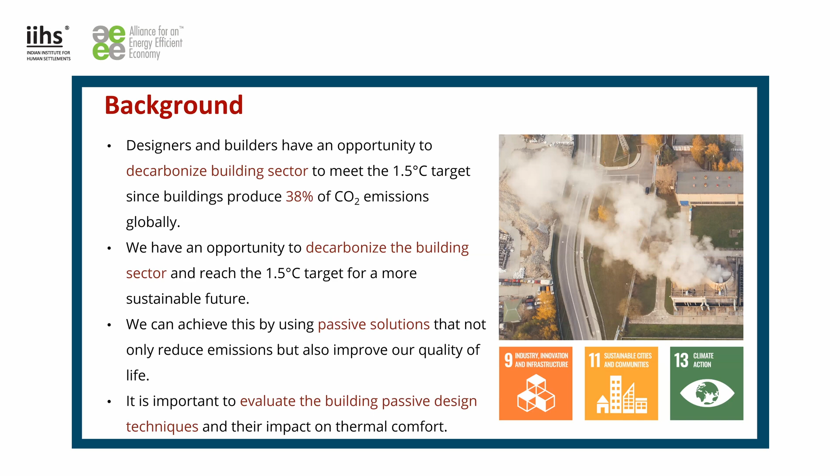Before I start, I want to start with a story of the experimental building. The whole webinar will revolve around this building. This building was actually built as a prototype to test different technologies and operational strategies for all the campuses that would come up in the 55-acre campus.

But here's the thing, this building was designed with insulated walls. All the walls in the experimental building are insulated. We use materials like CSEB, rammed earth, and AAC blocks with XPS insulation in all the walls.

This building is also being heavily monitored to measure things like indoor environmental quality, which includes temperature, RH, air quality inside the building, and also some outdoor parameters where we have a weather station installed. We're looking at water performance and energy performance to understand how it would behave in the experimental building. So it's heavily monitored.

This building is about 450 meters square, and it uses different passive techniques and materials. The idea of the experimental building was that we want to use this building as a tool to refine other buildings that would come up in the entire campus.

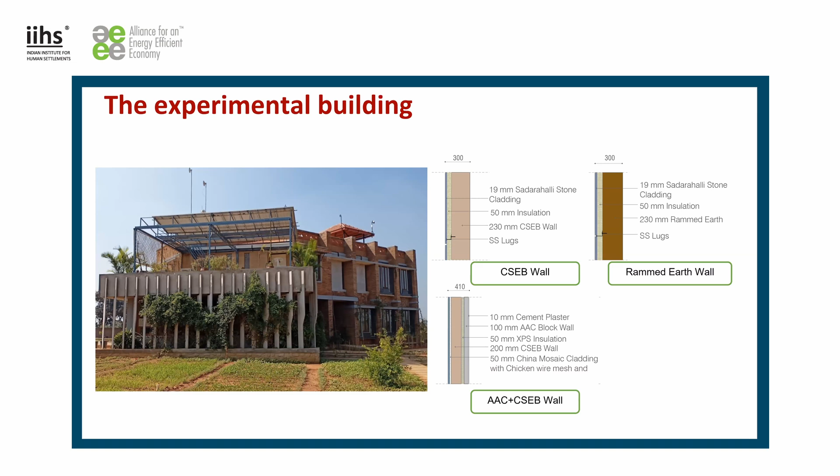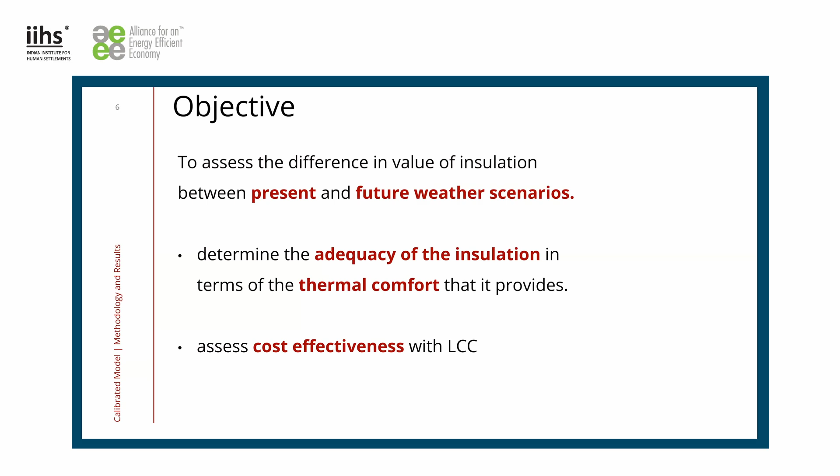Here's the main objective. The objective was very simple: using calibrated model, we want to assess the difference in the value of insulation between the present and future weather scenarios, looking at insulated and non-insulated walls. So there are two objectives: to determine the adequacy of insulation in terms of thermal comfort that it provides, and to assess cost effectiveness and thermal comfort between the present and future scenario.

The methodology that we followed was that we started with a detailed energy audit of the building, because we need all the data of how the building is performing. Then we modeled a calibrated energy model. Then we looked at the typical meteorological weather and also future weather, how it will perform. And for each weather scenario, we looked at the life cycle cost and the thermal comfort that it would provide.

Now, let's break down a bit more about what a calibrated model is and how we should approach it. When we run energy simulations, you might wonder, how can I be so sure that these results would actually match what's going on in the real building? And that's where the calibration model comes into play.

Model calibration is all about adjusting your simulation model or the simulation results so that it aligns with your real world or your monitored data of the building. Once that is done, you now have a model that can predict how your building will perform in different situations. You can use it for various case studies with a high level of accuracy.

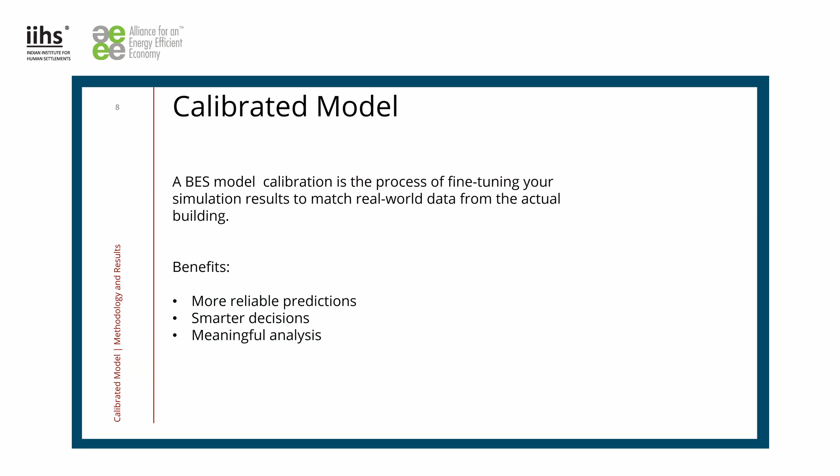And on the methodology, here is how we went about it. After collecting all the energy audit data and all the data of the building as it is being built, first we try to match the building geometry in the simulation model. So we started by using as-built drawings as a reference to make sure that the model reflects the actual building layout.

Then we looked at matching the lighting loads. We used the energy audit data and then gave inputs of all the lighting loads in the model. Similarly, we did a similar thing for the equipment as well.

Then the fourth thing that we did: so far we had been using the typical meteorological weather data. We replaced the TMY weather data with actual weather data, which we had because we had a weather station in the campus. We used that weather station data so that it matched the actual data as much as possible.

Then the last thing that we changed in the model was trying to match the occupancy schedule. We collected the occupancy patterns directly from the attendance logs so that we make sure that the model reflects the real usage schedules.

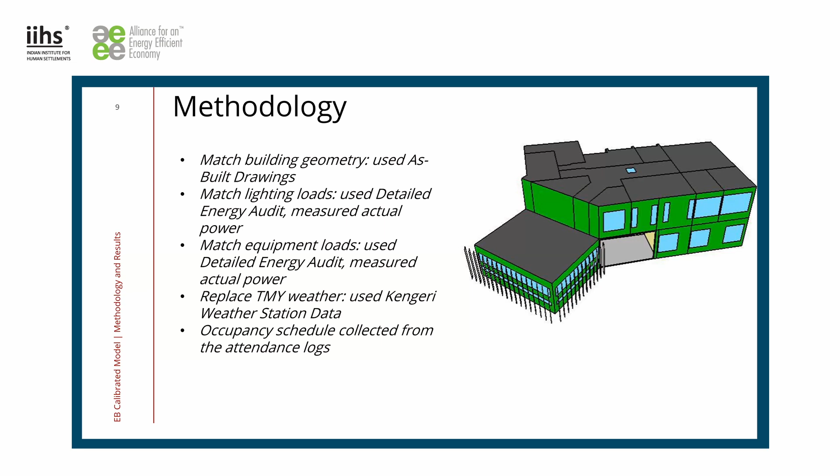Now, once we have the calibrated model with all those 4 to 5 steps ready, we run simulations and look at two errors: the mean bias error and the RMSE, root mean squared error. These are the two errors that we look at to see how close your model is with the real world data. This is based on the ASHRAE guideline 14.

What ASHRAE guideline says is that for MBE, mean bias error, your results should be within plus or minus 10%. And for RMSE, it should be less than 30%. But this 10% and 30% is for hourly data, hourly readings.

Why am I saying this? Because ASHRAE guideline also talks about monthly energy data. So you can either choose to calibrate your model based on your hourly measured data or your monthly energy data. But for monthly and hourly, your error range will be different. Right now, what I'm talking about is for hourly data.

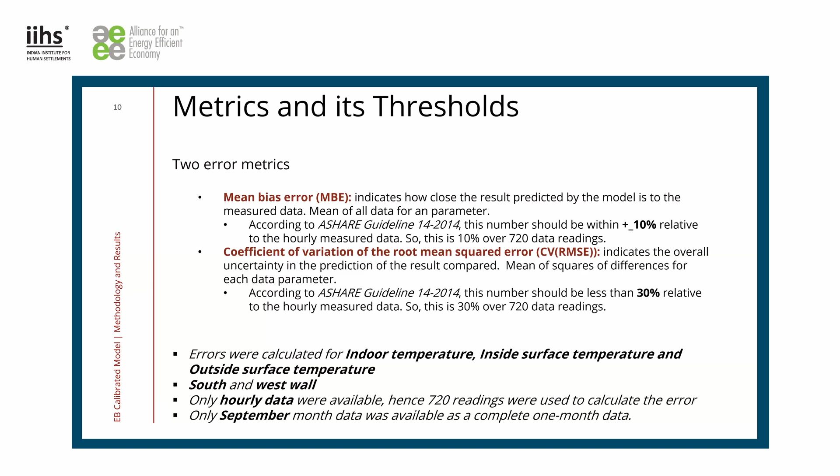So for our analysis, finally, we use indoor air temperature, inside surface temperature, and outside surface temperature. We then compared the simulation data and the measured data and calculated the two errors that I mentioned. And these are the results.

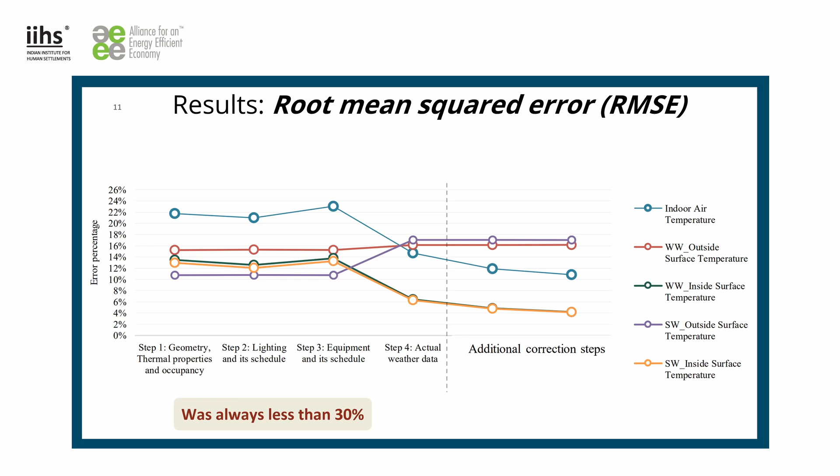For RMSE, they were always below 30%, as you can see in the chart. The x-axis shows all the steps that we followed, and the y-axis is the error percentage. So they were all within less than 30%.

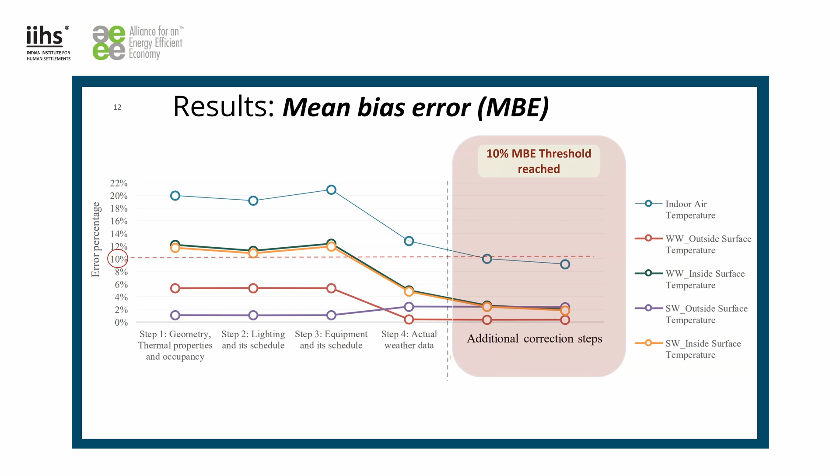In terms of the steps that we followed, after step 4 we had to take additional correction steps, and I'll explain what that means. Even after step 4, which is after changing to the actual weather file, for indoor air temperature we did not achieve the desired error percentage. You can see the blue line, which is above the red dotted line. So we had to do further calibration to achieve that.

So initially, this is the goal that we achieved. The mean bias error was 9%, which is less than plus minus 10%. And the RMSE was 17%, but that 17% was achieved through additional steps, which I'll talk about.

Before that, I want to talk about this graph here. The red line is the measured indoor air temperature, and the blue line is the simulated indoor air temperature. You can see there is a difference. At some period, as per the schedule, there is a wide difference in temperature, about 4 degrees, during the unoccupied hours.

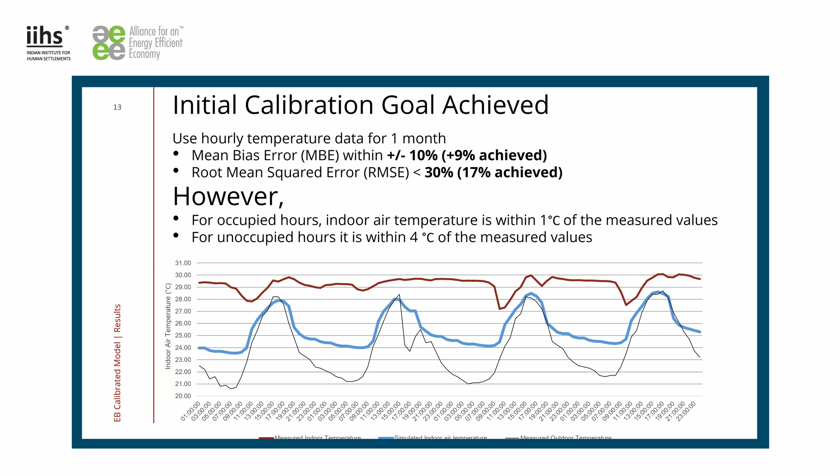So what we then did, to get the 17%, was modulate different things in the model, like changing the window schedule, improving the insulation, or sometimes removing the insulation, etc. This graph shows all the changes we had to make to achieve that 17%, reducing it to lower than 30%.

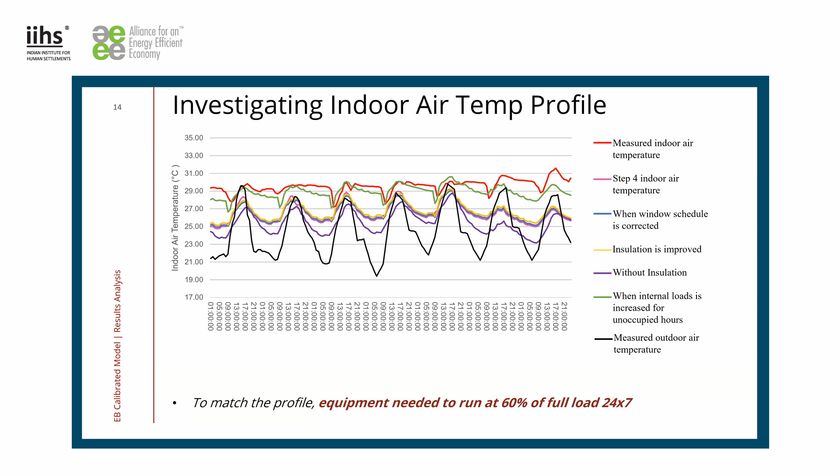But what we realized is that to achieve that, the equipment needed to run at 60% of full load 24/7, which is actually not true in the real scenario, to match the model. So we further investigated what is happening inside the building, and the question was: what is this constant internal load in the building that is always there?

Then we started brainstorming. It could be vampire equipment loads. Are there any rats occupying the building at night? Are there any dogs occupying it at night? Or is there any heat leaking inside the space? So all these scenarios, we started brainstorming.

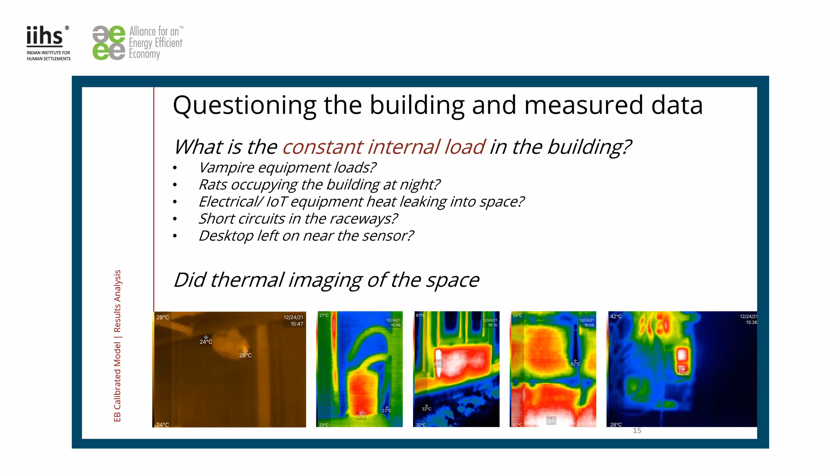Finally, what we did is we went there and did a thermal imaging of the whole space. But what we realized is that the measuring tool, the equipment measuring the indoor air temperature, you can see the thermal image of that. We call this the IoT box. It was actually producing heat.

So it was maintaining this constant indoor air temperature because of the heat. It was not reducing at night, which we would intuitively think it would, following some kind of trend line. That wasn't happening. Throughout, it was trying to maintain a very constant temperature, due to the heat generated in the measurement tool, or the IoT box.

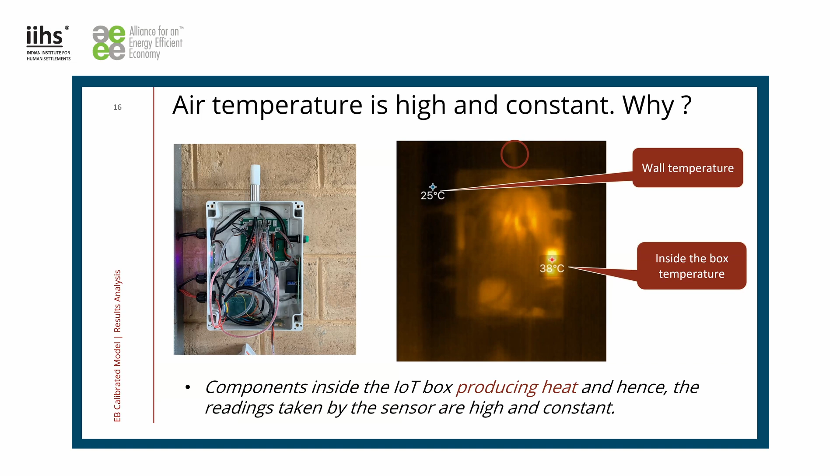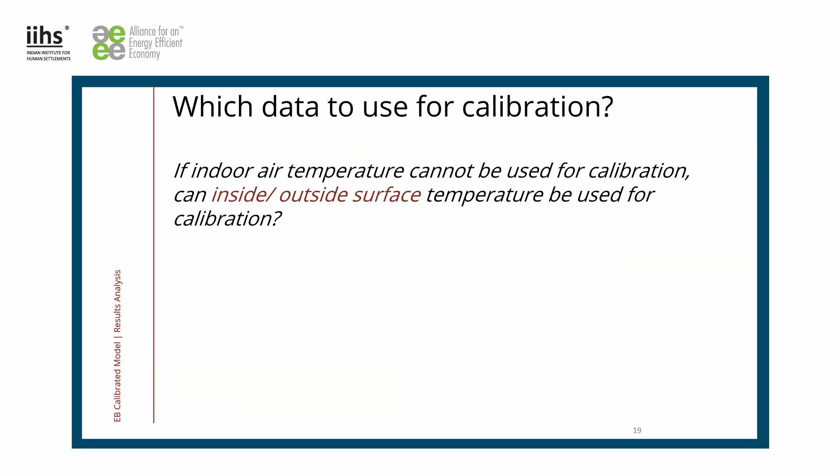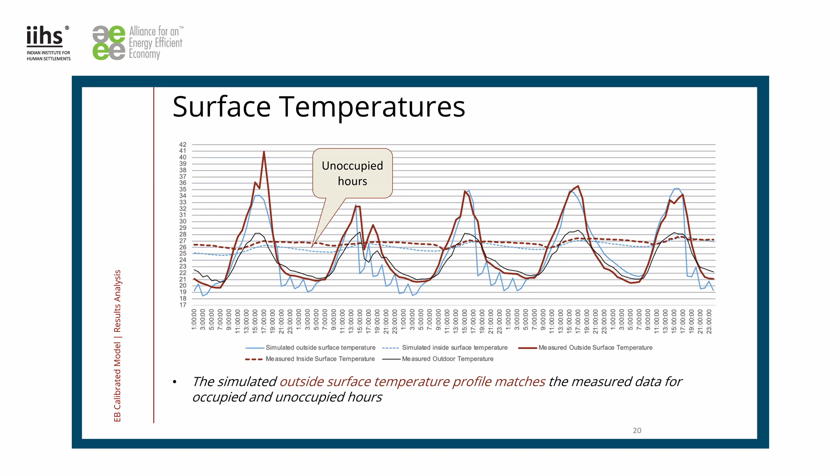If you think about building science, you would imagine the indoor surface temperature to have some time lag—when there's a dip in the indoor air temperature, the dip in the inside surface temperature of the wall would happen slightly later. But you don't see that here. So we investigated further about why this is happening.

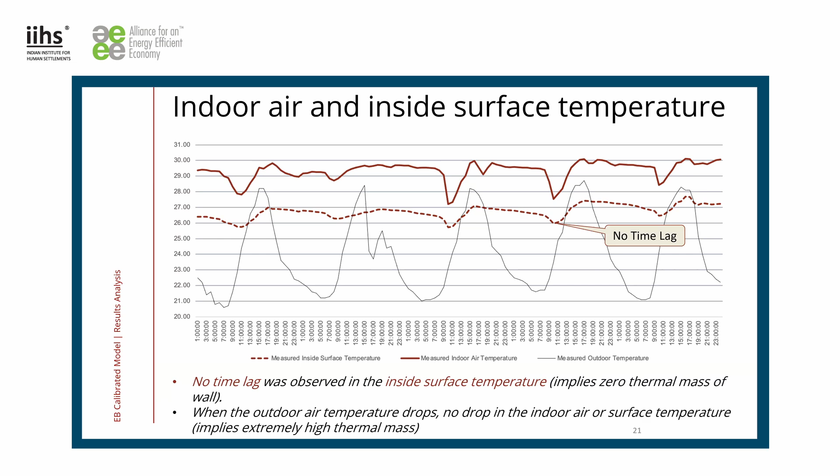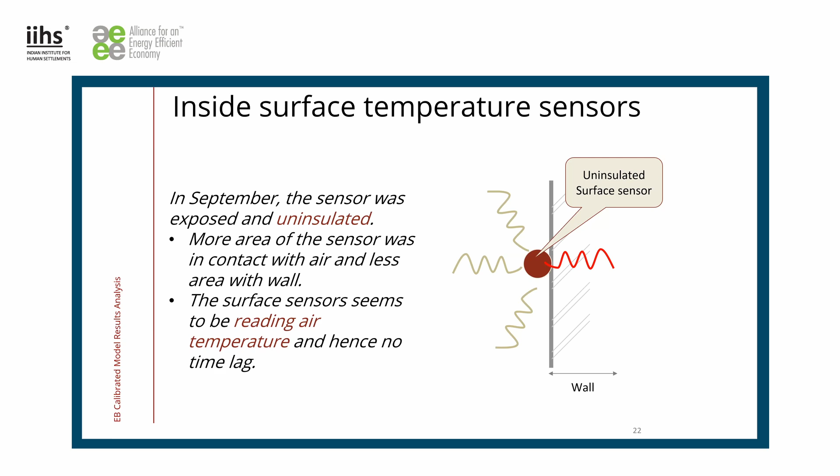This is to explain why that is happening. The sensor put on the wall surface was exposed and uninsulated, meaning more of the sensor's surface area was in contact with the air temperature and less was in contact with the wall, which is why it was reading very close to the indoor air temperature rather than the surface temperature.

So then we realized, does that mean our simulation results make sense? Because we saw some errors in the measured data. So let's look at the simulation data only.

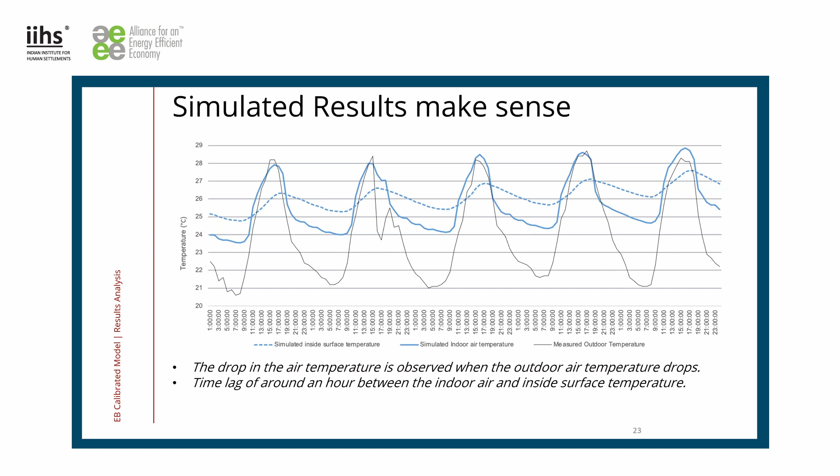Now all these blue lines are all the simulation results. We can see that the drop in air temperature is observed when the outdoor air temperature drops. There is a time lag of about an hour between the indoor air temperature and inside surface temperature. So the simulation results make more sense than the measured data.

Through this process, there are a couple of learnings we've had: model calibration helped us investigate how the building operation is happening, as well as the measurement system. After this, we really had to change our entire IoT box design, the measuring box itself, so that it takes accurate measurements.

And of course, another learning is the use of building science—first principles actually gave us confidence in the model, and we had to uncover measurement data errors because of these principles.

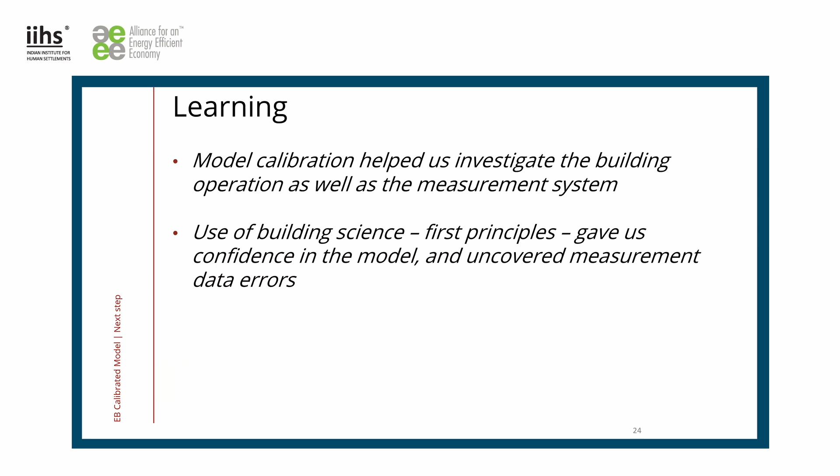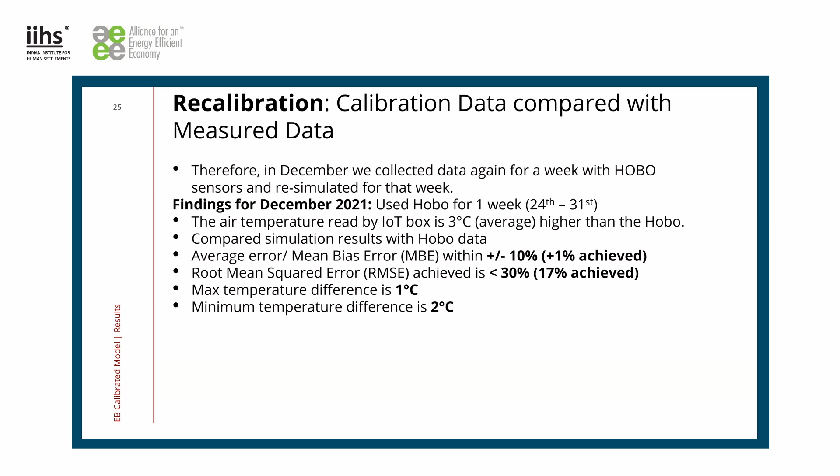But for our main objective, we still had to calibrate our model. So we did recalibration. What we did is we took another set of measurements using a calibrated measuring tool. And then this is the result we saw. We finally had a calibrated model.

So here you can see that the green line is the IoT box data, which is the wrong measuring box. However, you can see that the new measured data, the black line, and the simulated data, the red line, were very close. This is the 17% that was achieved that I was talking about. So through another set of readings, we were able to finally calibrate the model.

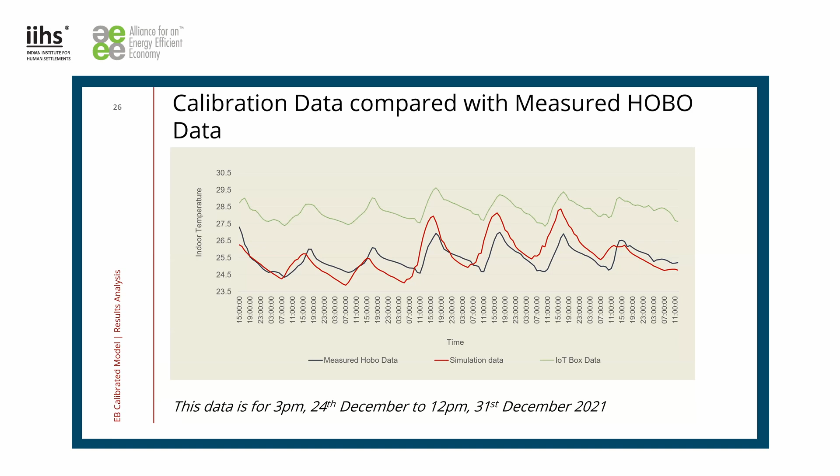Now, the beauty of a calibrated model is that you can do a lot of things with it once it is calibrated. But for this webinar, I'm going to talk about only one part of how we used this model, which is looking at the life cycle costs of materials that we envision to use in future, and also how it would perform, what would be the thermal performance of these materials.

So we use, there are three types of materials, right? However, we finally had to simulate 8 assemblies. Each of them with insulation and without insulation. Some of them had cladding, some did not have cladding. So these were the 8 wall types that we simulated to check the LCC and also thermal comfort.

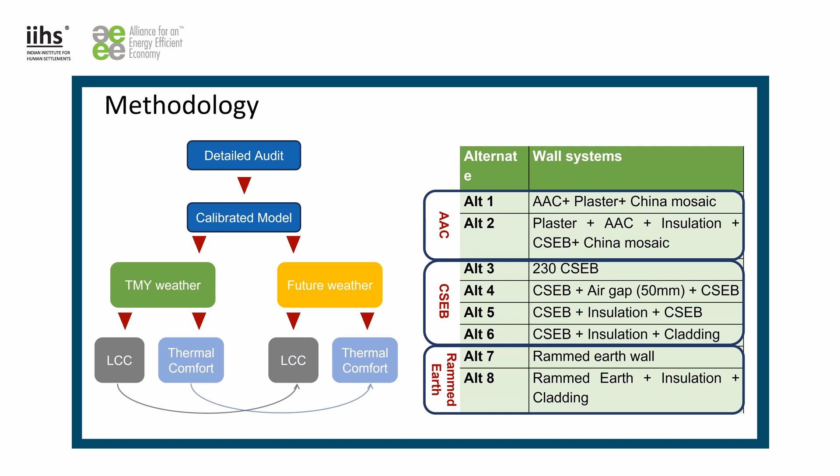For the life cycle cost analysis, we really did a very detailed life cycle cost analysis. Of course, we did not use any complicated tool or something, but we used an Excel tool. We developed an Excel tool for this study itself.

We considered energy cost and the utility tariff. Then we look at capital cost of civil works, and also considered the cost of air conditioning. We also considered maintenance, replacement cost, project management cost, GST - all the possible costs were considered for the LCC calculation.

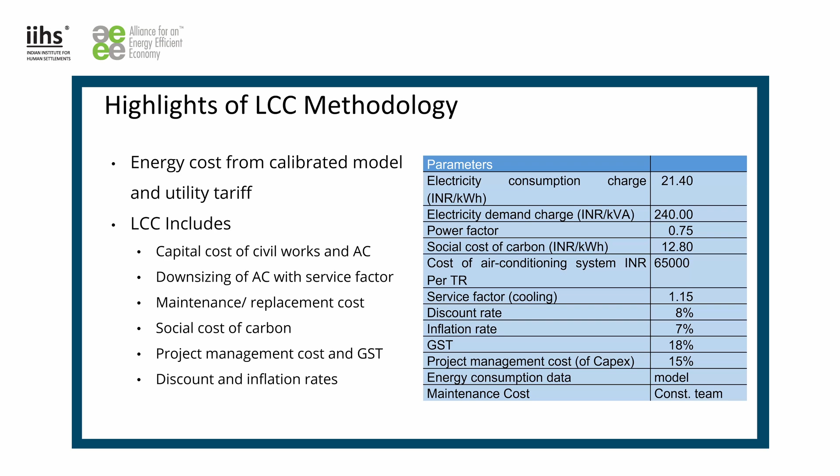Yeah, these are some numbers that we had used.

Apart from with insulation and without insulation, and also historical weather file and future weather file, there was another third parameter that we looked at, which is mixed mode versus fully air conditioned building. When I say mixed mode, if your whole building, some part of it is conditioned and part of it is not conditioned, or throughout the year some period your building is conditioned but the remaining period you don't condition - that is one scenario we considered. The other scenario is when your building is fully conditioned throughout the year. So mixed mode and air conditioned.

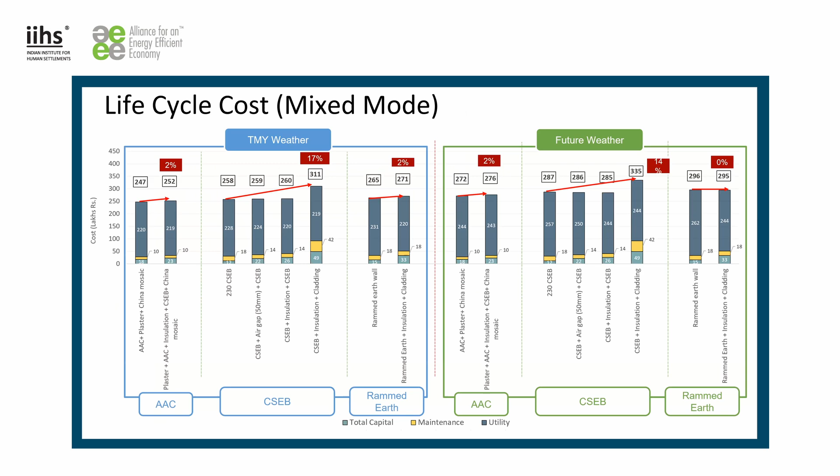So what I would say is that in mixed mode operation, we did it for a 50-year life cycle cost analysis. The insulated wall was not cost effective because you can see that it increases in all the scenarios, even with the historical weather conditions or with the future weather conditions. This is because of the insignificant reduction in the utility cost. You can see the blue color in the chart - there's minimal reduction in the mixed mode scenario. So because of that, the utility cost is so minimal compared to your capital and maintenance cost, which is why you're not seeing that it is cost effective over a 50-year life cycle cost analysis.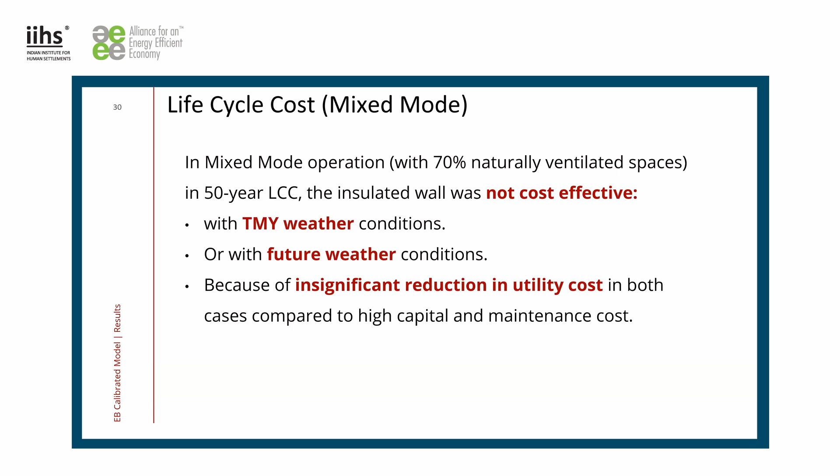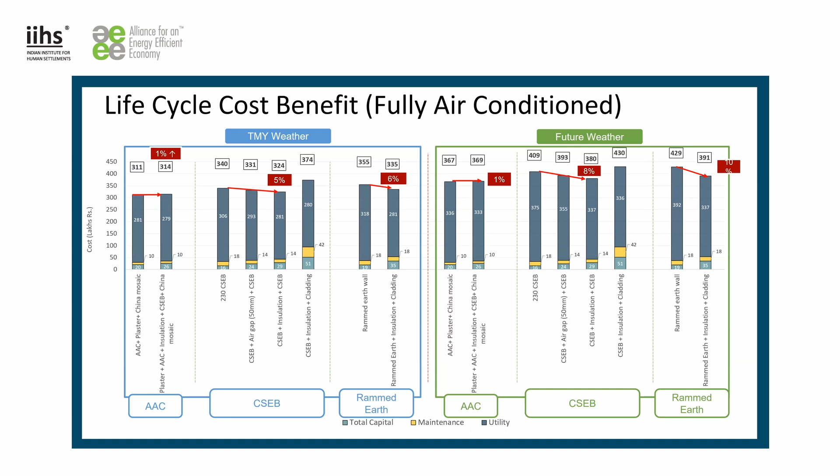Now, the next chart that I'm showing is for the fully air conditioned scenario. Again, you have historical weather and future weather. Here you can see that in most of the scenarios - forget about the last bar which has cladding in it, which is slightly very high because of the cladding cost - but or else, you see that the life cycle cost reduces. So here, what we are seeing is that the insulated wall is cost effective with TMY weather conditions and also future weather conditions, because of the significant reduction in the utility cost compared to your mixed mode scenario.

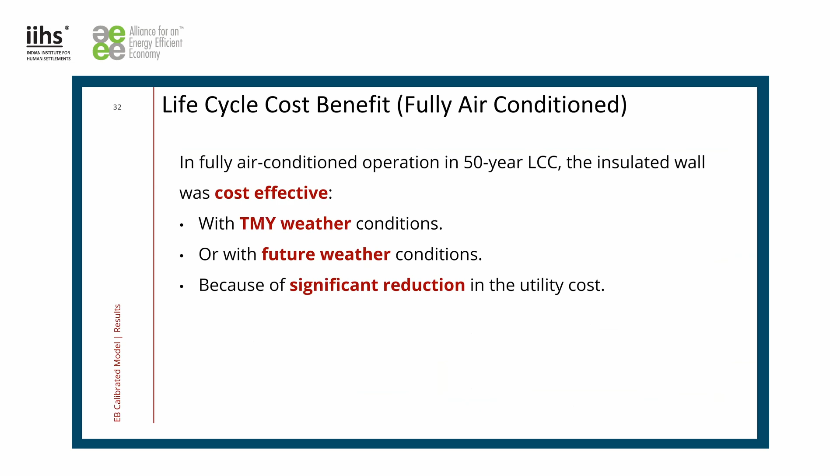So that was part of your life cycle cost analysis, where we looked at whether your cost will reduce or not. But the question is, how would it perform? Will it be thermally comfortable with insulation or without insulation? So finally, for mixed mode operation, we saw that life cycle cost analysis for insulated walls are not cost effective, which means we don't want insulation if it's going to be a mixed mode operation. Again, this is for Bangalore climate, not for all climates.

Also, in this building, 70% of the spaces were unconditioned. But the question we wanted to answer next is whether these unconditioned spaces are thermally comfortable with insulation in future weather conditions. Life cycle cost analysis said that for mixed mode operation, you don't need insulation because it's not cost effective. But the question we're trying to answer is: let's say it has insulation—would it perform thermally? Will it be thermally comfortable?

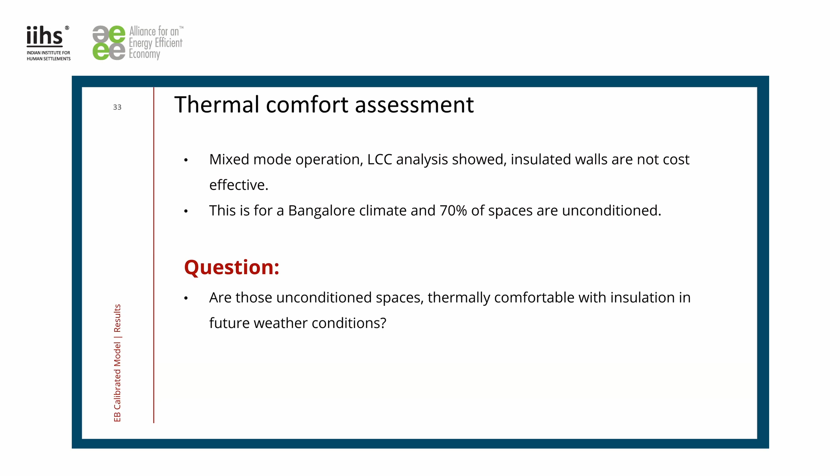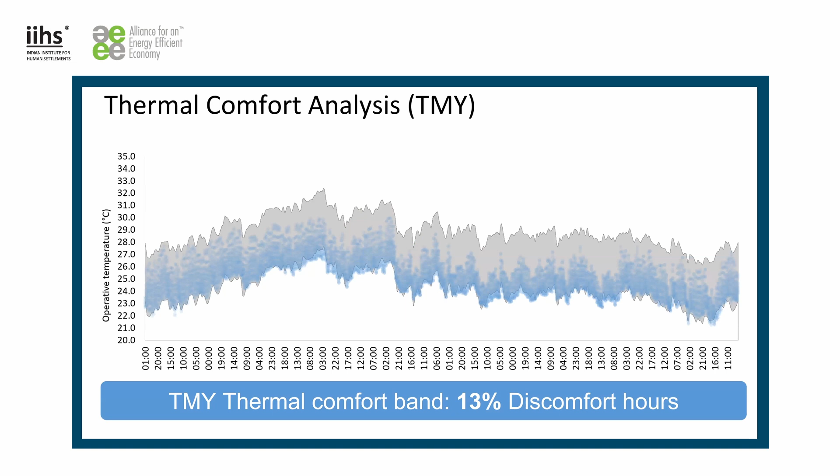Now, this third part is again your future weather generation. However, your band is still the typical thermal comfort band, meaning we are assuming that we will not be adapted to warmer global or local temperatures in future. So in that case, our thermal comfort band stays the same. However, if your building is for future conditions, how would it perform? You see that the number of discomfort hours has increased here—it's gone to 31%, with operative temperature maximum of about 6 degrees Celsius above the upper limit of the band.

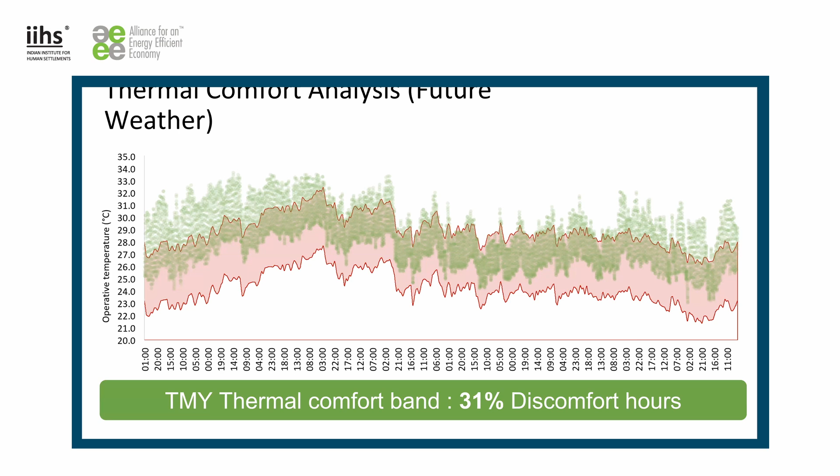So what did the thermal comfort assessment tell us? It told us that for future weather, your operative temperature will exceed the upper limit by about 3 to 6 degrees Celsius. Through literature, we know that ceiling fans are able to provide about 6 degrees Celsius of corrective power, meaning if you have ceiling fans turned on, you can reduce that temperature. In Bangalore's future climate, if we have insulation in walls, it will provide thermal comfort without AC if ceiling fans are switched on. But one question that remains is: will the thermal comfort band shift upwards, assuming we will adapt to future conditions, or not? If we are not able to adapt, then maybe even ceiling fans might not be enough.

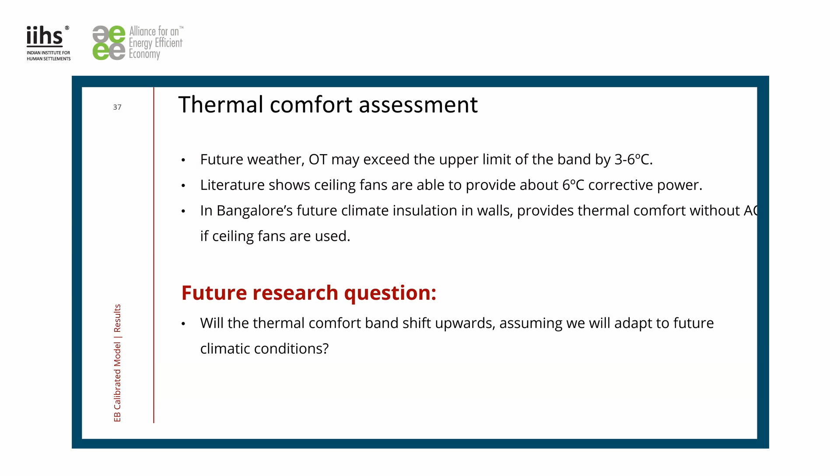So finally, through this case study, this is the conclusion slide. I think this is my last slide.

The overall results through this study were, of course, some learnings from the calibrated model, but especially for the LCC study and thermal comfort study, we saw that insulated walls have a lower life cycle cost if the building is fully air conditioned, whereas in mixed mode operations, it has higher life cycle costs for insulated walls. This is true for both historical weather and future based analysis.

In the detailed thermal comfort analysis for historical weather and 2080 weather, we saw that an insulated building is able to provide adequate thermal comfort with about 11 to 13% of discomfort hours over the annual years. If the 2080 case does not include full adaptation of thermal comfort conditions, consistent with the adaptive comfort equation of the National Building Code, then the worst case would be that 31% of the discomfort hours will be there. We will not be comfortable for 31% of the annual hours, which is about 6 degrees Celsius outside the comfort band.

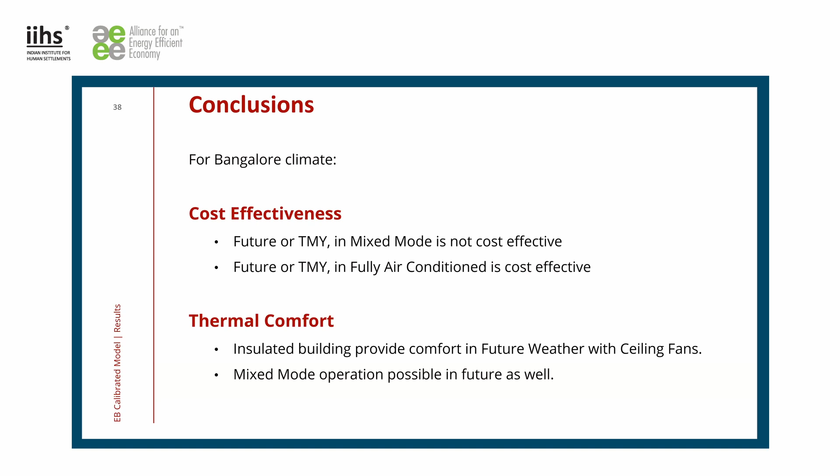Yeah, so thank you. Thank you, Amanda. Very nice presentation, and good to know that we can save 30 crores just by simulations.

Good knowledge. So we have one question from Atif. Very thorough analysis and nicely presented. When you consider future weather conditions, did you also consider future energy tariffs? Yes, we also did consider future energy tariff.

Okay, and we have one question from Karina. Karina, do you want to speak it or have it written? You can raise your hand. Her first question is: for any project, can a calibrated model be directly created, or does it require a simulated model to be created first?

So for any project you will need a simulated model. However, it will not be just a simple simulated model. You would need a lot of details of how it was actually built, how it is performing, etc. All those details would be required to calibrate your model as close as possible to the real world scenario. Second question: what would be the requirements to create a calibrated model for a project? So yeah, as mentioned, all the specifications that exist in the real world.